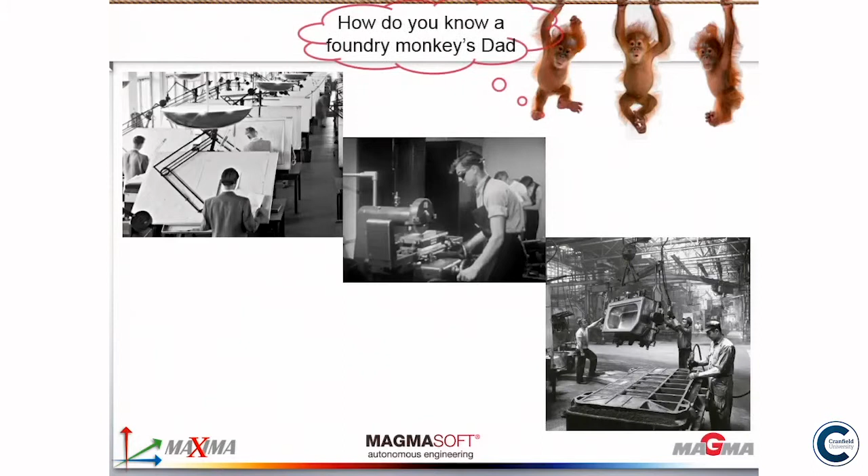The 3 monkeys had 3 dads in their industry. There was the design monkey's dad - he was a designer in the day when the world was grey, no computers, no CAD systems, just drawing boards. The tooling monkey's dad worked in a tool shop on these tools. And there's the foundry monkey's dad - you can always recognise a foundry monkey, because they wear hats and there's a bit of sand here - this is a foundry.

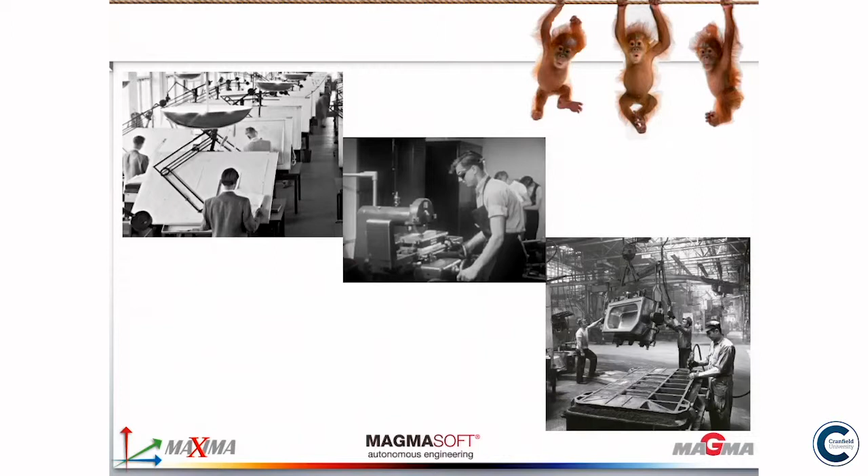The design monkey on the left is actually called Richard Kingsley, Senior Designer Underframe at Aston Martin Cars. I asked him about this, and he told me about this film clip, and he also told me about Die Another Day.

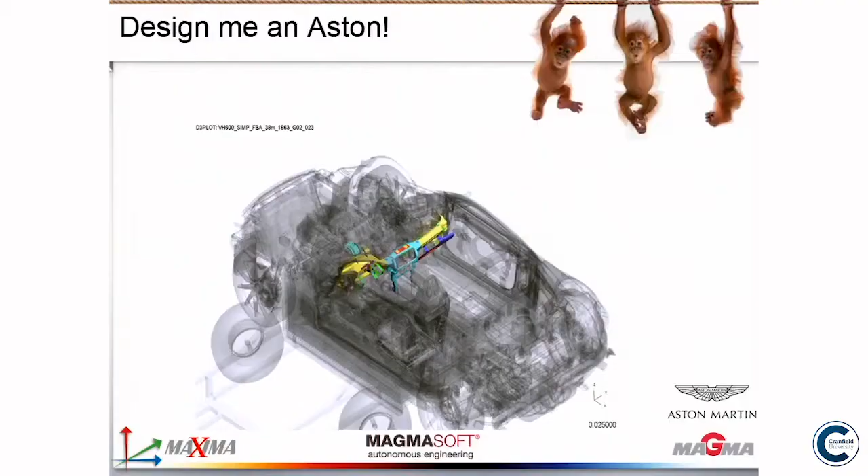So they're going to make this. They sit down and get a timing plan from the evil project manager, which says here we'll have feasibility, here we'll have the tooling, here we'll cut it. The foundry monkey gets his try-out and mods. At the end of this, you get 5 weeks to sort it out after you've cut the tool, in a program that lasts about 6 months. So 6 months from the start of design, you've got to have a crash-ready car.

And in May, they told me you've got to have this ready to have 40 cars in March. And they hadn't finished the design yet. Great, this is going to be fun. So what are we going to do?

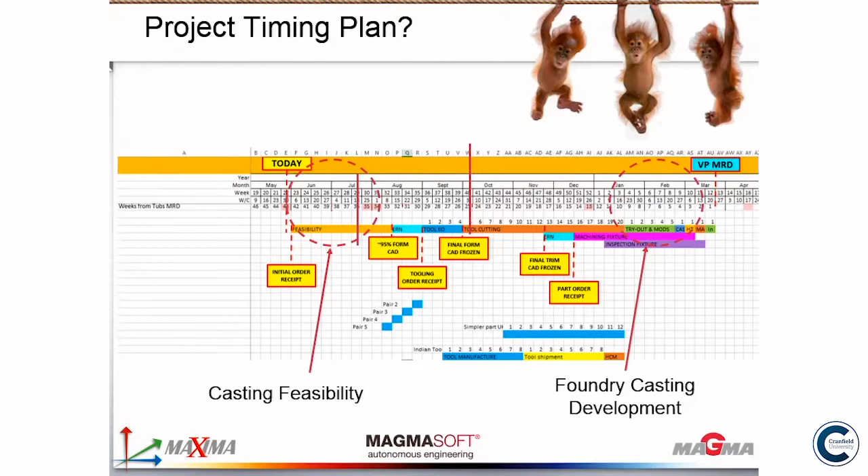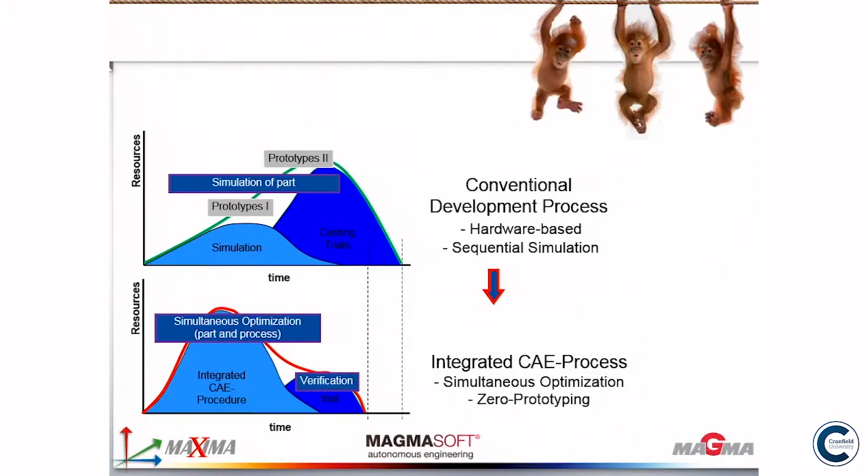The foundry monkey, they asked me, could I do it? And yeah, no way, can't do it. So the only way we're going to get to do this is if we think about it. The foundry monkey had been off to a thing called GIFA, and he'd seen presentations on integrated computer-aided engineering, where you try and crush the development time by doing a lot of simulation work up front, working together as a team on your agile supply chain. So that's what we're going to try and do.

So this is what the design monkey had given me, and the tooling monkey wasn't really interested. But now the foundry monkey's thinking, I've got some clever stuff here. He's taken the plastic strain plots out of this crash test and looked at where the casting deforms and where the heavy loads are going through.

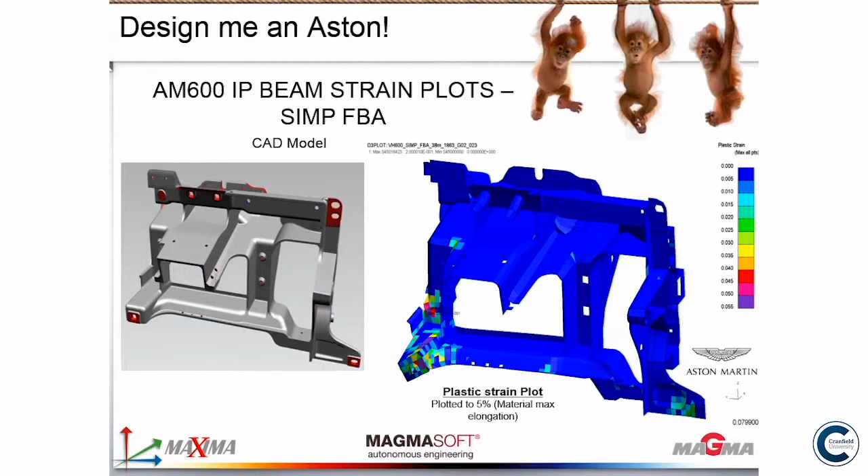So the foundry monkey's talking to the design monkey and involving the tooling monkey. They know this now - this is integrated computer-aided engineering. He's got his Magmasoft simulation, and he's done some very simple things, and he's seeing a lot of isolated areas of liquid up here. This is going to be a problem, because that's going to have shrinkage in it, and that's exactly the place where the high deformation rates are.

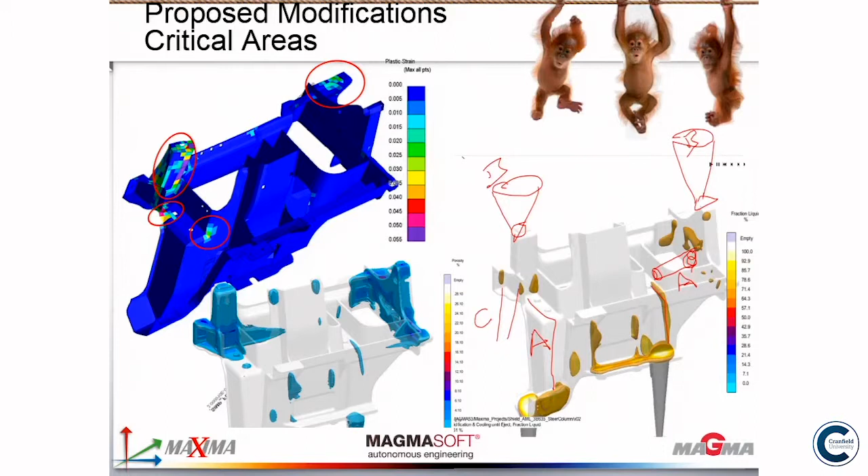So we've got a problem, and the worst bit of the casting, really. So they've got some ideas - let's stick some feeders on it, let's build some feed paths through it. Working as a team on their agile supply chain, the monkeys went away and started playing around with putting bits into it, adding feed bars in here, which had to be machined out - so we got the machining monkey involved as well.

This is all going on about 6 months in. And they ran some simulation work, and they see that this one without feeders, this one with the feeders on top, has no feed path. There's no point putting this big lump in there if there's no feed path. The foundry monkey knows that, he's not so stupid. And he tells the design monkey and the tooling monkey what he knows.

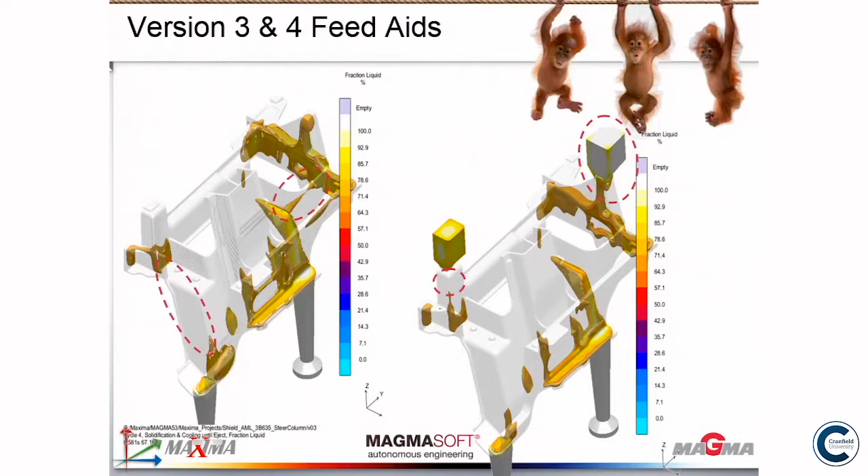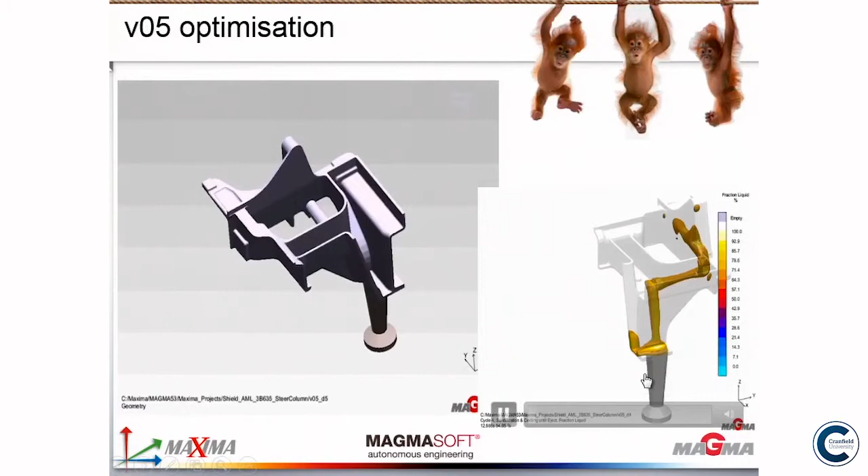So they move on through the process, talking to each other all the time, and they use some things called process optimization tools, which can change designs and shapes. You see on the left here, the feed path is being changed automatically by a bit of software and multiple simulation runs. What the foundry monkey's trying to do is develop a feed path up one side of the casting to try and make this area sound by putting in this feed bar. It adds weight to the casting.

And he's keeping his mates on the supply chain involved. He's looking at the weight of the casting - this is the total weight of the casting and the feed path to add. So they actually took some weight out of the casting, and the design monkey likes that, because the casting's getting lighter. But he's putting in this feed path, this bit that goes up the side here, trying to develop it.

An interesting bit of the project was, I've got casting here, but this is the steering tunnel, and the steering column actually bolts onto here. And they were cutting threads into these parts, and they didn't want to put a nut on the back. We spent a lot of time and effort trying to make these bits sound, but couldn't get there. So we persuaded the design monkey in the end, he's going to put a nut on the back. He wouldn't have enough thread pickup. We did all that to try and help it out.

And so we ended up with our model.

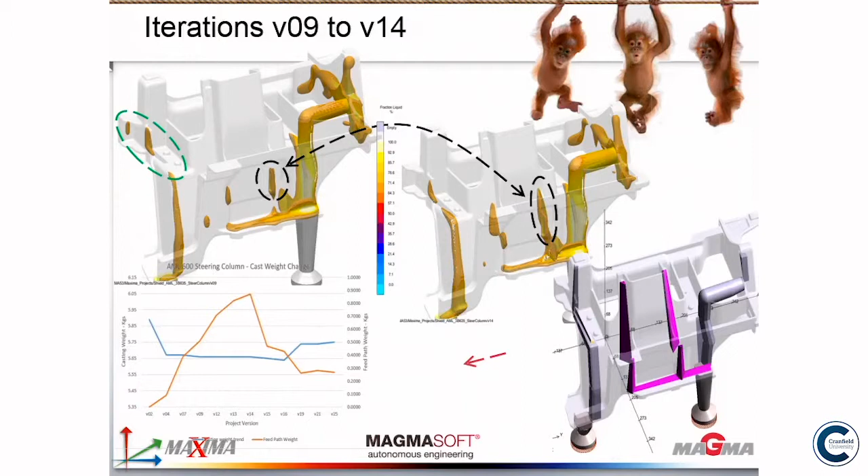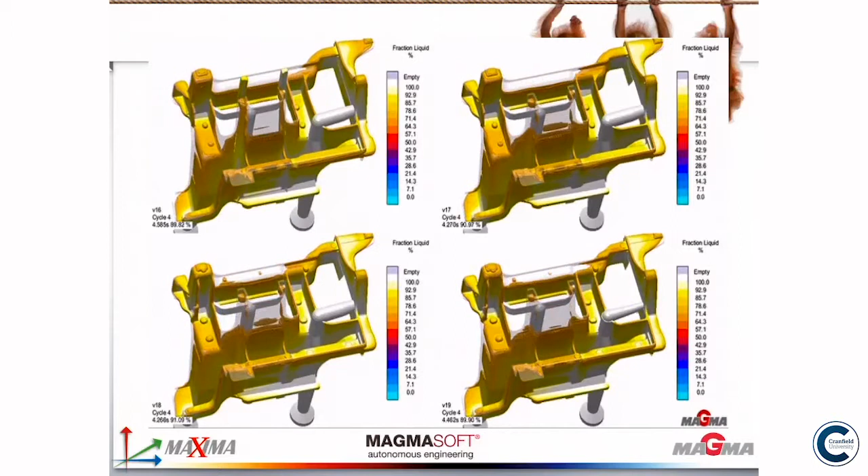I didn't practice this. We ended up with this as our model, and we actually put a sprue in the back here. We looked at cooling in the die. We got up to 20 virtual castings as we're going through here, comparing them all, different ways of doing it to see which way they solidify, and seeing what's going on in the back there.

And this was an automatic, autonomous optimization tool with a parametric CAD modeler.

What a load of rubbish.

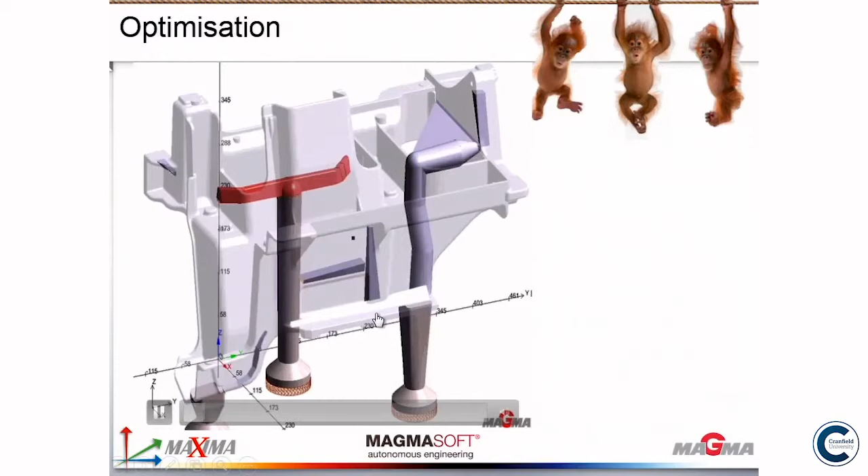The software here is varying the geometry automatically to try and get a feed path up over here. I want you to note this bit - I'm trying to get a feed path up here to try and get this part of the casting sound. I'll come back to that later. I was trying to develop a feed path up here.

I've given up going up here. I'm going to put a third sprue in the back to feed this bit up through here, varying little bits around, so I'm varying the geometry automatically. And of course, which one works? So the foundry monkey has to work his way through all these, and at the end of it, we came up with a tooling model.

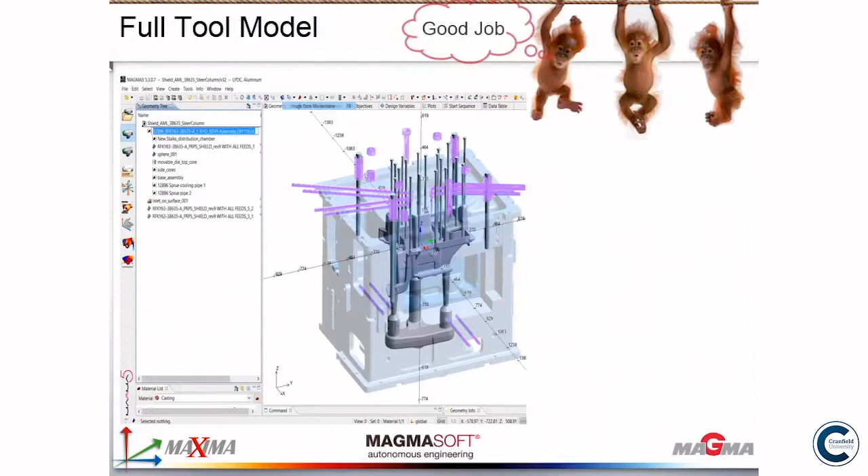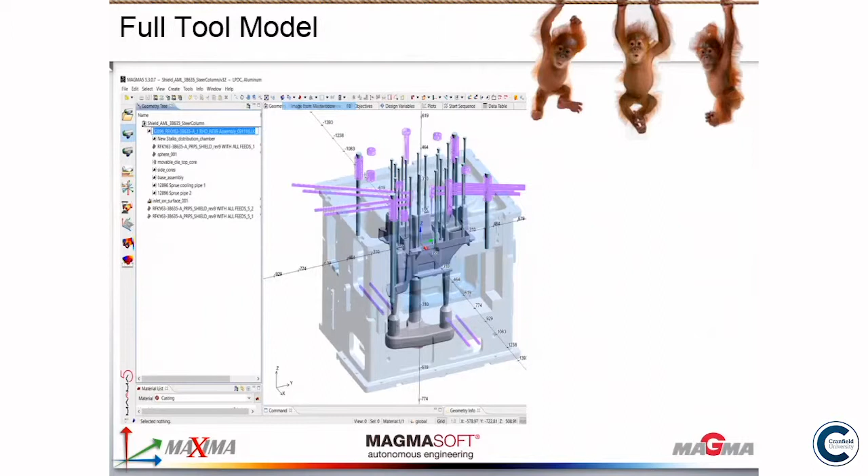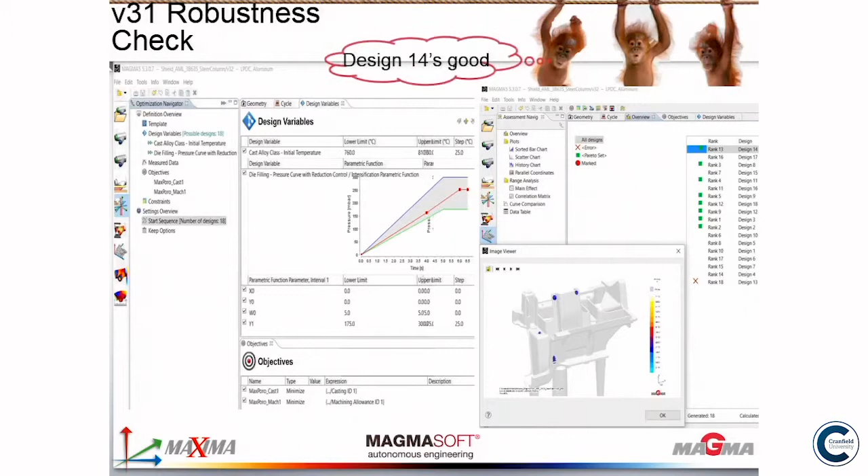Danny mentioned about robustness, so we want this to work repeatedly. We did some robustness testing, clever little foundry monkey. This is a low pressure die casting machine, pressure time window, in which we allow these 3 points to wobble around in this design space, which they do in reality - it's never consistent. We allow the temperature to go up and down between 810 and 760 and 25 degree steps. We end up with 18 different possibilities, all which we calculate, and we look to see which one is the best and how it varies.

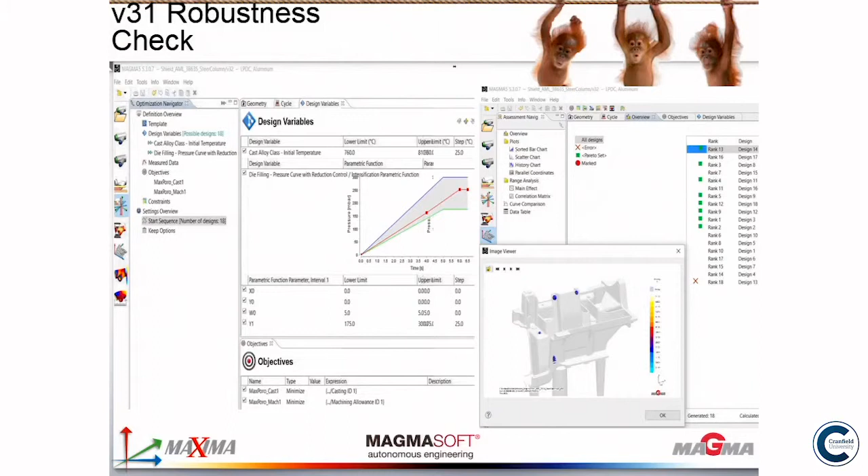So we're seeing this shrinkage in here that's always there, and we're seeing some porosity down here that's always there. So we did a robustness check, and it looks fairly robust. These are all tools and things that the Foundry Monkey can do and talk to his design people with.

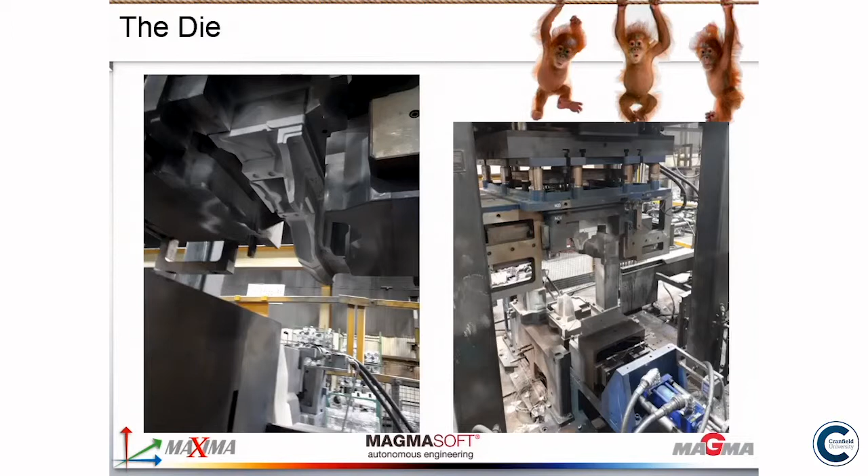So the Tooling Monkey made this die, and it turns up in the foundry, and yeah, you turn up and get your toes burnt, and it is a foundry. So there's the tool, and it went onto the machine, and we had to make 40 of these right first time. But the clever little Foundry Monkey also knew that he could do a heat treatment simulation, a machining simulation.

There's another part they made for the damper that goes on the back of it - I won't talk about it too much. So they did some distortion tests using stress simulation models to see if the casting would bend or distort while it's going through it.

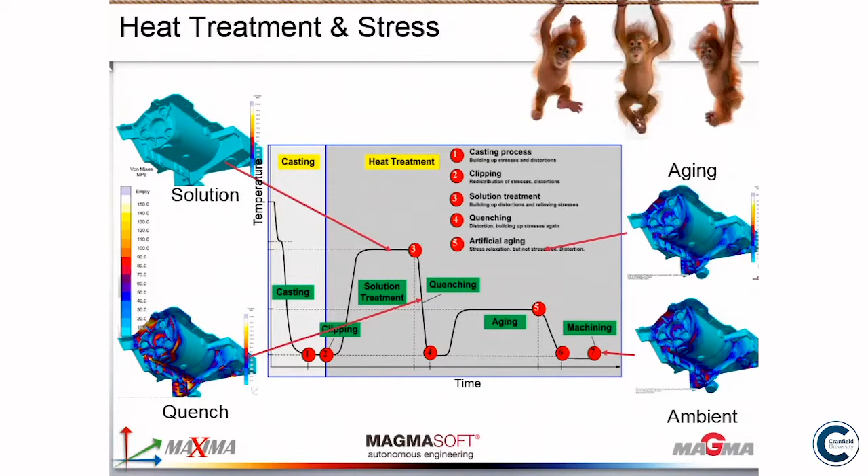And at the end of the day, this casting is designed by this team of people: the design engineer, tooling engineer, foundry engineer, and a machining engineer. But the picture only had 3 monkeys in it, don't forget, so I couldn't include the machining guy.

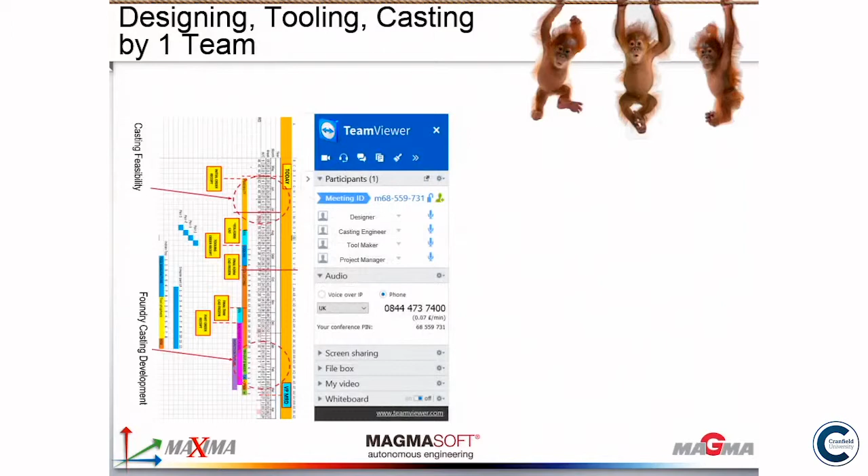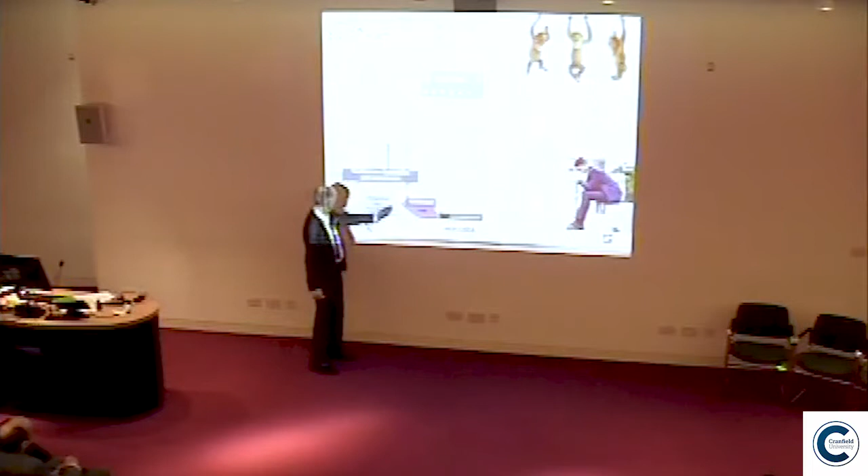They've created this tool and turned this timing plan on its side. They did a lot of stuff with web meetings, discussing things, modifying CAD models, sending simulation results back and forth, trying to do this integrated computer-aided engineering, a lot of simulation work up front, just a very small amount of work on the foundry. So this is going from a concept, not even a finished CAD model, in about May, to a crash test ready car in March. They did actually crash some of them.

As a problem comes along with all this, this person here is the evil project manager, also known as salesmen and buyers, and they try to stop these people working together. When they don't communicate and interact at these interfaces between the toolmaker, the designer and the foundry, information gets lost. That's where value is created or destroyed. All he's interested in is what the casting is like. He doesn't want to know how it's made, he just wants his bit in a bag cheaply.

So the monkeys managed to make it well, and they managed to design it as one team.

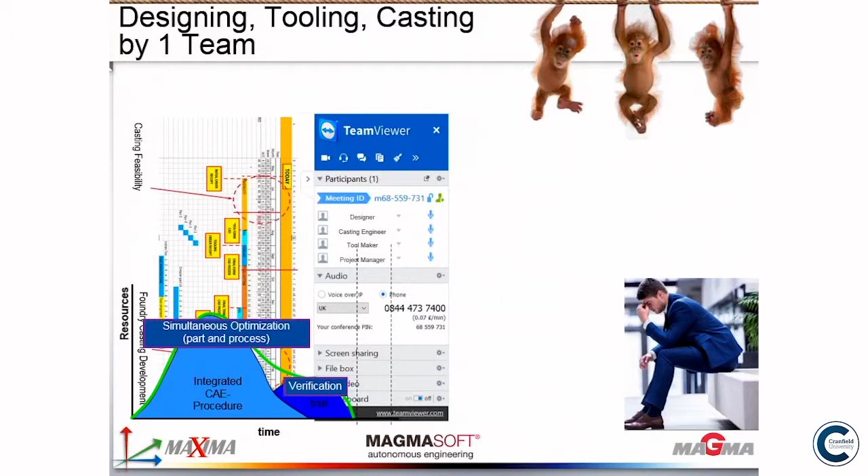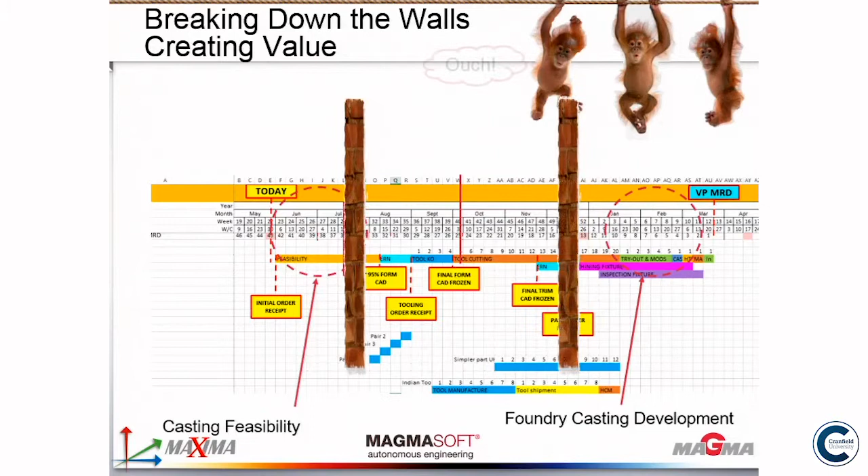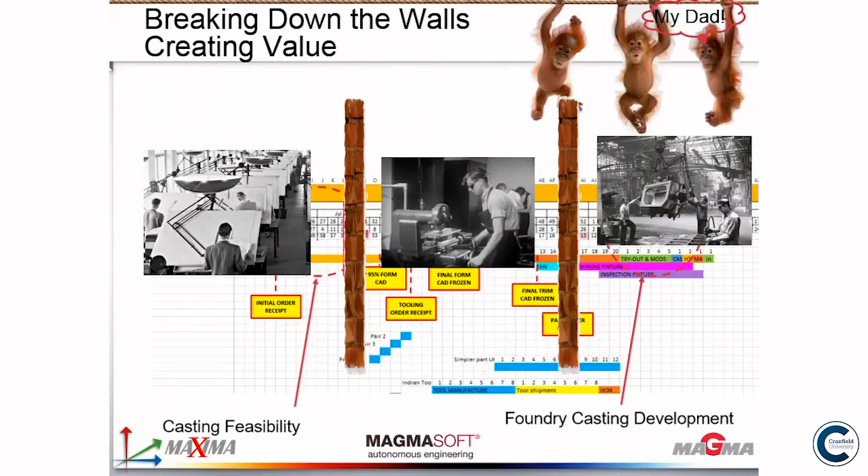Compared to the dads that made foundry castings in the day and worked in the foundry, the walls that used to exist between the design engineer, the tooling engineer, and the foundry engineer, we tried to break those down. Back when everybody was grey and the world was pretty grey, this guy had months and months, a few years, to work on his design. This guy had months and months to work on his tool. This guy had weeks and weeks, probably months, to make a casting, to send the tool back to this guy, to then tell this guy they couldn't make it, and to know that you didn't have a car.

All this stuff has been crushed down, and times have been reduced. And this is all possible today.

While I was thinking about this, forget the monkeys for a minute, this is a bit serious. I thought we had 5 phases to developing functional castings. And if anybody wants it, I can let them have it.

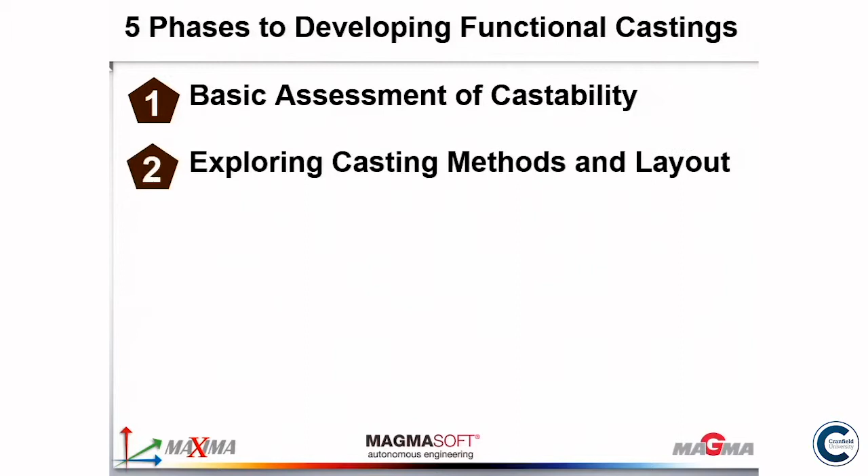Phase 1, we did a basic assessment of castability. Could it be made? Did we think it could be made? Phase 2, we looked at its methods and layout. Phase 3, we did all this integrated computer-aided engineering to develop a method for manufacture. Then in phase 4, we checked it with a robustness check, that it didn't distort, had the right mechanical properties. And then in phase 5, we went and made it.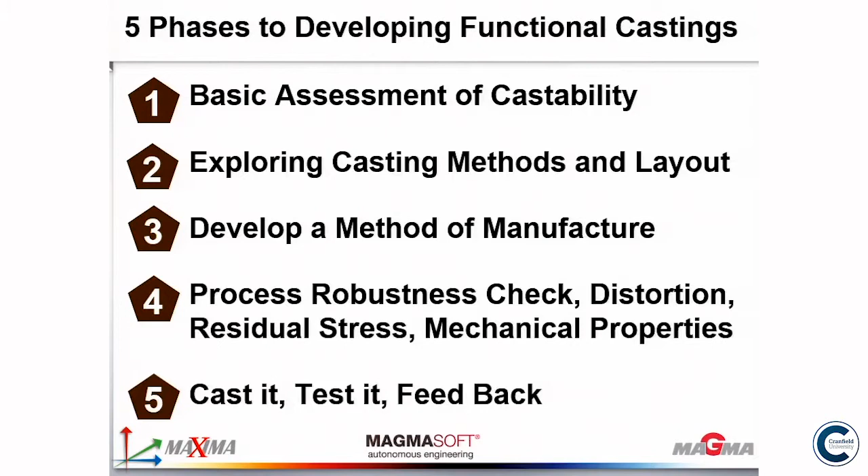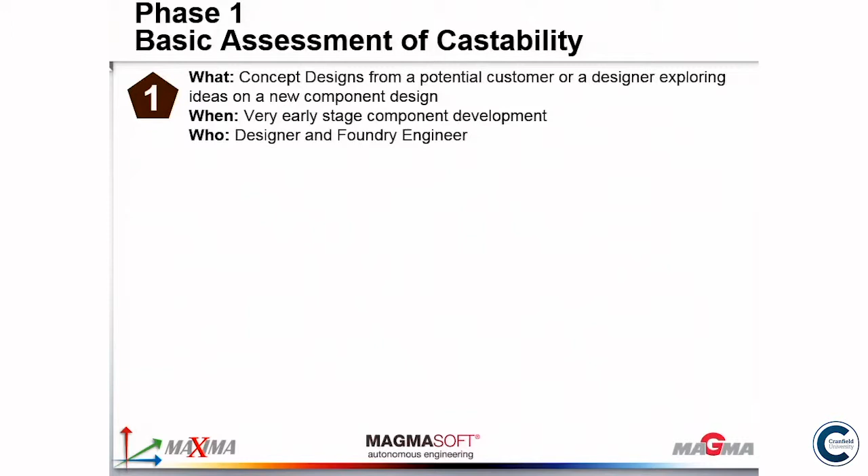Prototypeless manufacture, and I've done this for my users. What do you do in phase 1? Concept designs from a potential customer. Who do you get involved? Very early stage developments, designers and foundry engineers. What do you do, or what have you got? A CAD model, no drafting, no fillets. If you're a designer, at very, very early stages, show your design to the foundry people, to the tooling people, ask them what they think, get some good feedback from them at the very early stage.

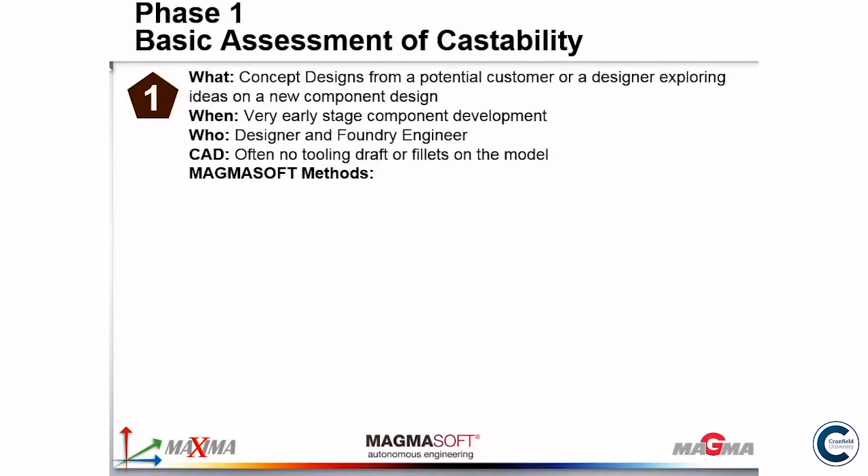And then our MAGMASOFT methods we use.

Knowledge exchange, this is something - knowledge exchange, talk to each other basically. Every foundry engineer should know where the highly stressed areas are in every casting he's making. Most of them don't, because they don't ask for it, or the design guys don't give it to them. So if you're designing castings and you've got a stress loading map, give it to the guy that's making it, tell him about it. If you're making castings, or somebody asks you to make a casting, ask them for it. That's one of the things that really came out of this that was good.

What alloy choice, things like that, because you could change the alloys, manufacturing costs and options, even things like this. These design people would like to know some of these costs, yields. If you do your simulation work up front and you really talk to one another, you can talk about yields and costs and that sort of thing.

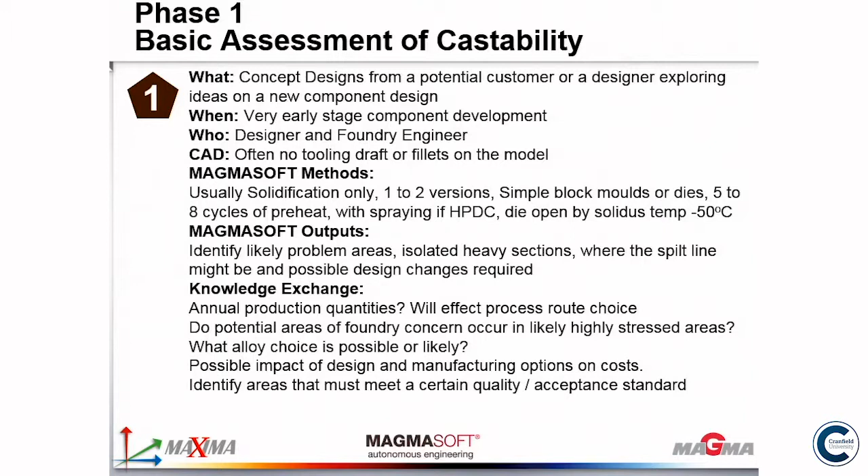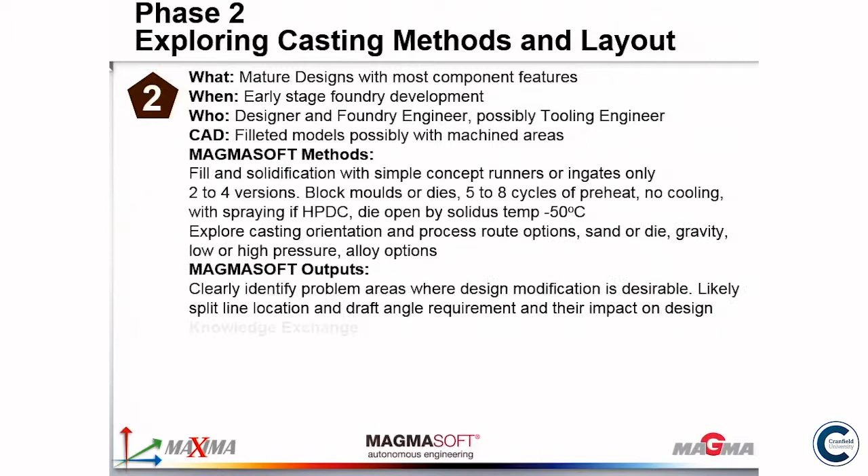So creating value by maximising your yield, by minimising material usage. Then at stage 2, mature designs, most component features, early stage, designer, foundry, possibly a tooling engineer, filleted models. What do you do? Stage 3 is where you really start to hit it with a really big hammer, with mature design on all components, and this is where you really want to start doing your stuff. Commercial stuff as well starts to come in.

If you're a designer or buyer of castings, the earlier you nominate the foundry and get involved, the easier life gets, and that's where the problems come. If you want to keep that competition between foundries, they're not going to work with you. That's one of those issues.

Full die assemblies at the end of it. You start with filleted models, and you've committed to a process route. Are you going to high or low pressure? How many are you going to make? What sort of cost goals, if you like?

You know, if you want a Formula 1 engineer, you can pay a few thousand pounds for a casting. If it's going to be in my car, it's got to be a few hundred because I can't afford any more. I haven't got an Aston Martin. I never get the chance to be James Bond either.

All these results, all these communications, we had daily web meetings. We didn't meet up very often, we had daily web meetings, talking to each other over the internet. And we completely bypassed the project management system, basically. We went around them completely, we didn't even involve them.

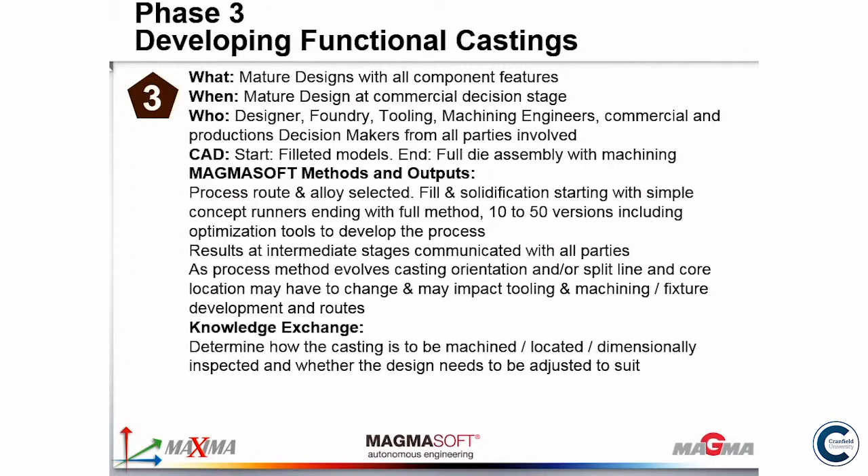We're going to determine how the casting is machined, the machining locations, dimension implications, inspection, and feedback all as you go.

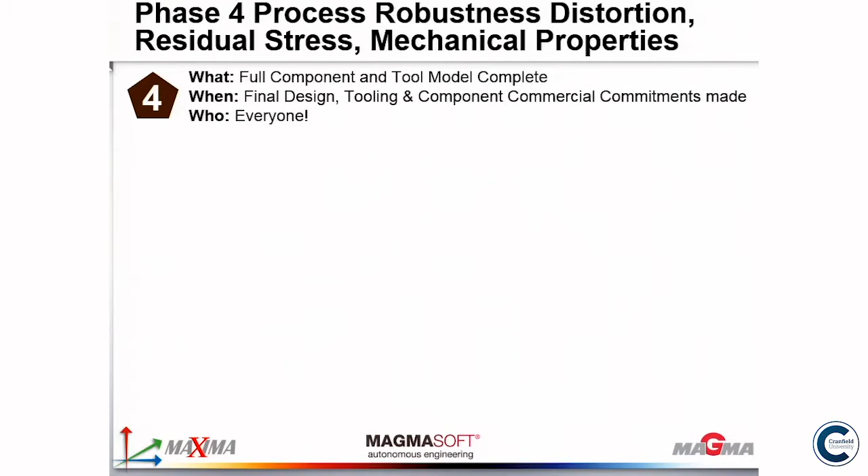Then on the 4th thing, you do the robustness testing. Danny mentioned it, everybody involved. Does it repeat? Does it give you the same thing again? So virtual property maps, treatment, robustness checks, and tell everybody what you find, what's going on. And we can even map and give these results back to the designer on FEA models, and then they can put that back into their crash simulations, because very often they're assuming homogeneous properties, that it's the same everywhere, there's no defects. We can tell them where the defects are and they can take that into account.

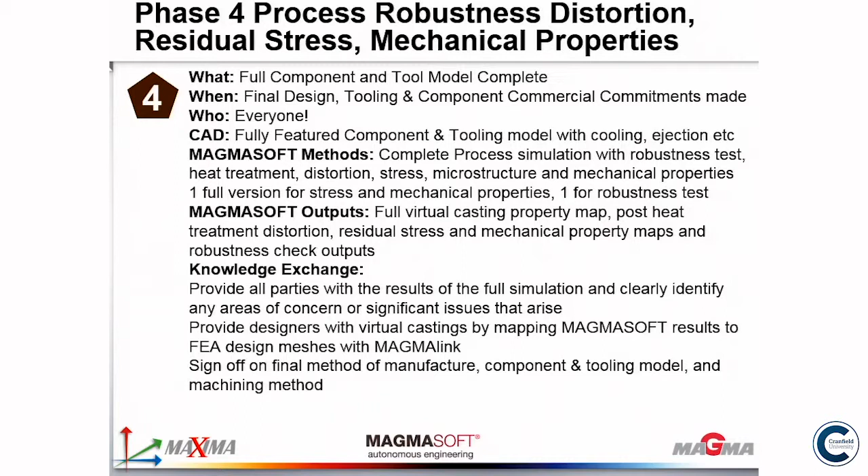Sign off on the final method of manufacture. I've got one on the floor here, I brought it along today, but it's being made now, this casting. The interesting thing on it, you know what I said about looking down in the bottom here? Yes, down at the bottom here, this is actually about 8 months old now. Down at the bottom here, there's some shrinkage.

The evil quality engineer's turned up and he says, I don't like shrinkage in my castings, get rid of it. So the foundry have got to jump now because the customer's saying the quality engineer doesn't like that. And the guy who's doing this at Shield Aluminium in Kettering, the foundry making it, and the foundry engineer, Daniel Christmas, is working on it. I've trained him up. He's being pressurised to make some modifications to the process.

And I showed there's these defects down here at the beginning. We couldn't get rid of them, so we left them. But this is the highly stressed area - no, it's not in a highly stressed area. We know that, and the design engineer knew that. So it's not perfection, but it's fit for purpose. And just because a quality engineer turns up now and says make it perfect, I've got to do my job, make it perfect - don't mess with it, don't bugger it about. It works.

Were there predicted defects that couldn't be fixed in the casting? If yes, don't mess about with the tool to please a quality engineer. And that's come up just in the last month or so, 18 months in. The first ones have gone off and you can buy a car and drive around in it. I haven't got one, 'cause I can't afford one.

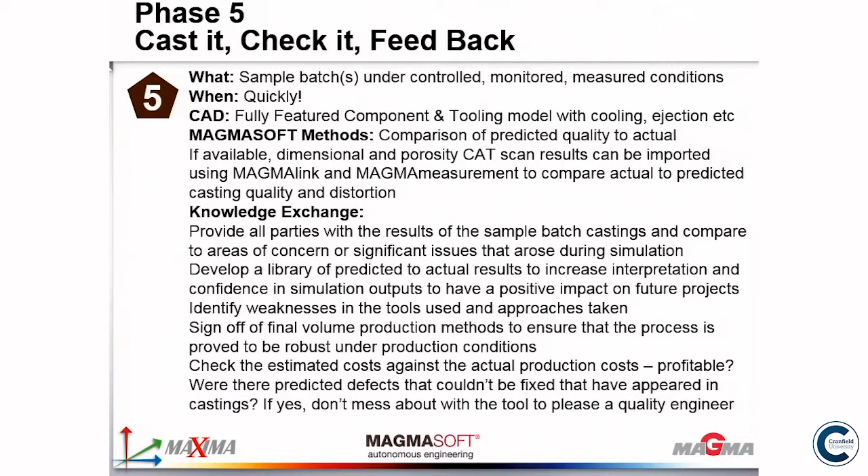That is this agile supply chain, and it's a design chain. And I think we did deliver these best-in-class products. Nobody else made it, so there's only one tool, so half the cost of their peers.